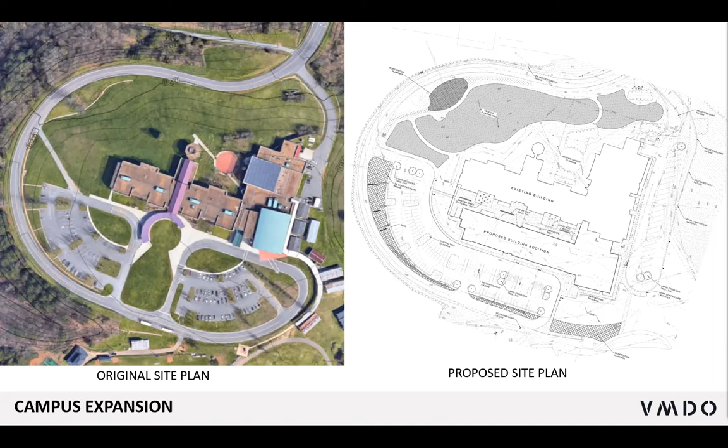Bedford County's recent $25 million Forest Middle School expansion increases capacity to 1,200 students with a new addition featuring a secure entrance, competition gymnasium, additional arts and media spaces, and most importantly, transformational learning environments for 6th, 7th, and 8th graders. The project would add significant new learning space to a 1994 building, reconfigure site circulation, and provide targeted renovations to a limited number of existing facilities.

A key goal of the project was to replace nearly 25-year-old modular classrooms, initially thought of as temporary, but that had clearly outlived their welcome on this campus. The openness and separateness of these remote trailers created a sense of unease among all learners and spurred a committed effort among the design team to create a cohesive, safe, and secure campus.

In order to allow foot traffic to and from these modular units in the school building, doors in both were kept unlocked. This and exposure to weather during travel in and out posed a serious security threat to the school community. As it was essential for school to continue uninterrupted in this location, an important part of the design process involved coordinating planned new construction and renovation activities with the existing school calendar.

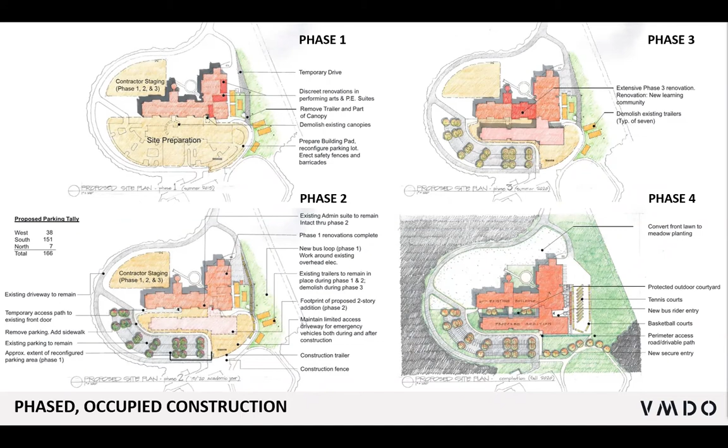The new school gymnasium is designed to serve as a protected shelter from weather and other emergency events. In addition, it provides learning and activity space during and after school, more than doubling the square footage for physical education, instruction, and activity. By increasing the seating capacity and court size in the new gym from the original undersized facility, athletic competitions at Forest Middle are safer events now. There's less crowding of the court and common areas, enabling spectators to keep a safe distance from participants.

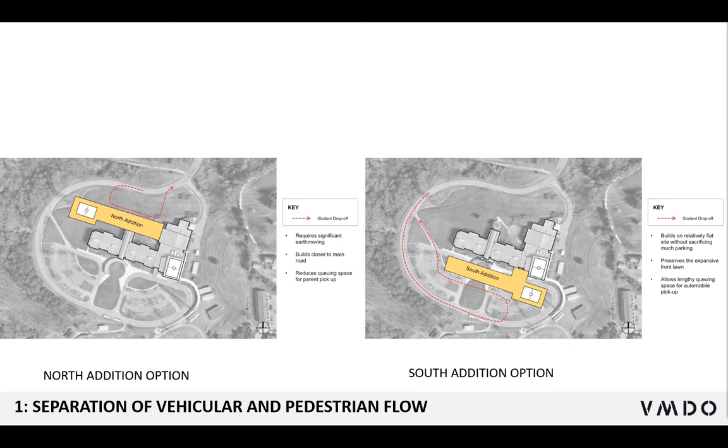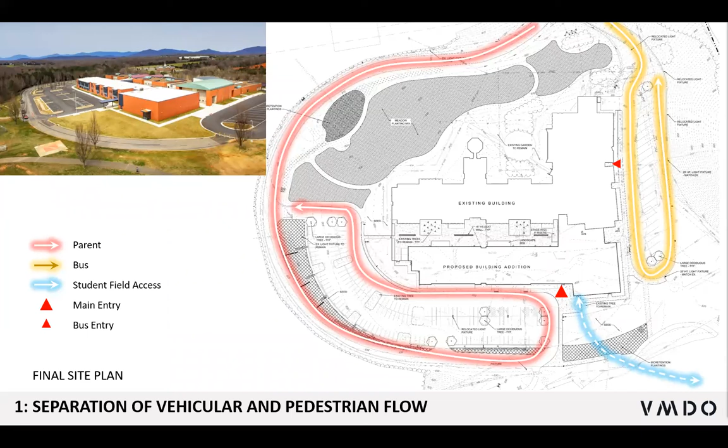Principle number 2, a singular entry. A clearly identifiable school entrance helps to direct all visitors to a central check-in location, simplifying monitoring responsibilities and making intruders who approach other school entrances more obvious. At Forest Middle School, an existing sculptural entry canopy was relocated and incorporated in the new design to emphasize the school's entry point.

All doors are now secured with badge access technology rather than keys. This gives school staff greater control of who can gain entry, through which entrances, and when.

Principle number 3, views from the front office. Abundant exterior windows at the reception area allow the school staff there to monitor everyone approaching the school. In this view from the reception area, front office staff have a commanding view of the school parking lot, of students, and of visitors. The school resource officer's office, just to the left in this view, has a similar view and overlooks the secure vestibule as well. The glass used in this area of the building is laminated to resist forced entry.

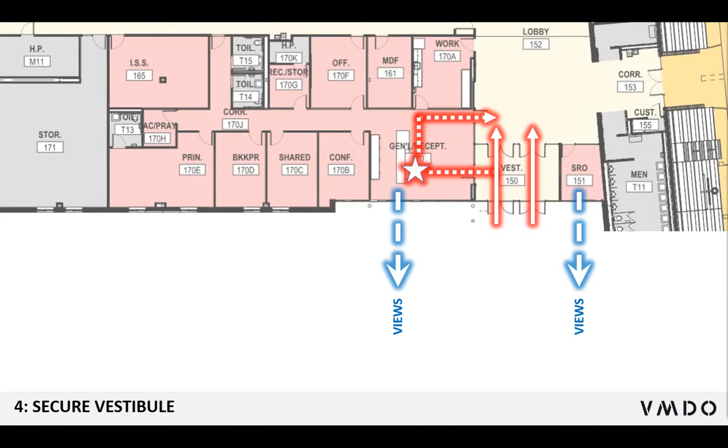Principle number 5, discreet guidance entrance. A modest entrance to this suite off the beaten path gives students a chance to duck in to see a counselor without attracting the attention of their classmates. Repurposing this original school office space into a private and respectful suite allows for expanded mental health services, placing the counseling staff in spaces connected to community mental health agency personnel and the school clinic.

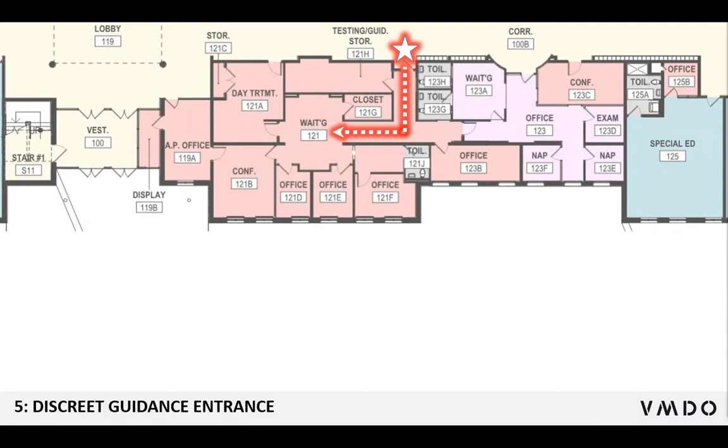Principle number 6, a cool down zone. Outside of the principal's office and separate from the school's public lobby, a small safe space is provided for agitated students who can wait to meet with administrators without being seen or heard by others.

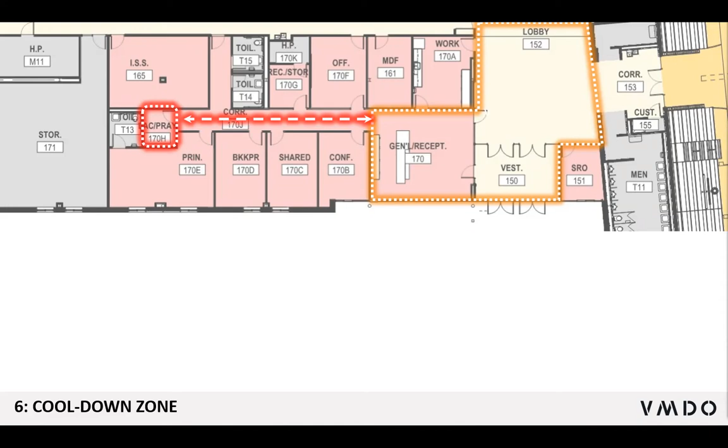Principle number 7, improving internal circulation. Previously arranged as a long singular spine, this new enlarged school is arranged around an oval of circulation, reducing traffic congestion and offering multiple pathways for teachers and staff to quickly respond to incidents.

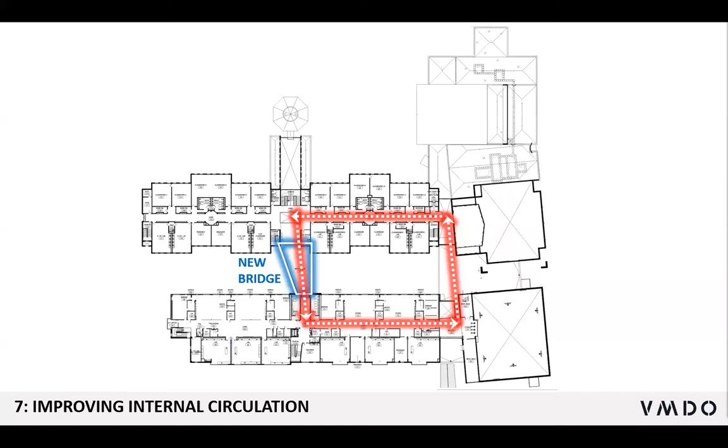In this view, an open second-story occupiable bridge connects the original school at the top of the plan with the new parallel addition at the bottom of the plan and overlooks the interstitial courtyard. This is a flexible and open space that, in addition to school circulation, serves as a project-based learning center and an expansion of the traditional library.

Principle number 8, layers of security. Threats identified outside the school entrance can be thwarted by closing and locking intermediate doors that isolate learning communities from the school's entrance. These are represented by the red bars on the floor plan. A panic button in the school's reception area automatically releases magnets that otherwise hold these pairs of doors open.

Bryce? A key benefit to this strategy that we've used in multiple schools is that we're isolating wings of the building rather than simply isolating classrooms. This allows the interior of those wings to be designed in a much more open and connected manner, and creates a better overall interior environment for what is the primary function of this building, education. During an event, however, it allows staff to potentially work together should an incident occur rather than being isolated or cut off from each other in their own individual classrooms.

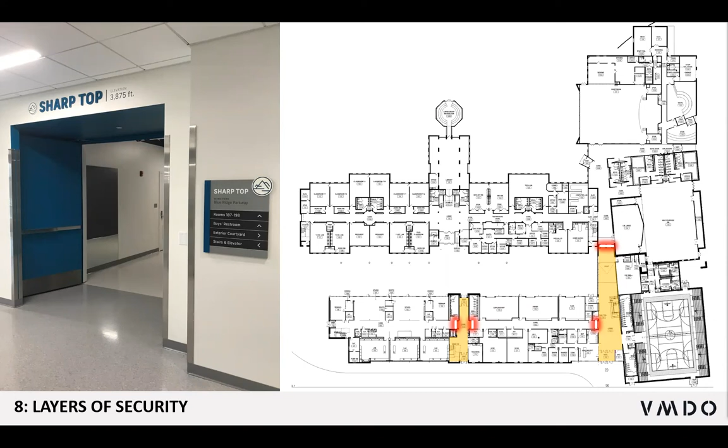In addition to this technology feature, interior and exterior security cameras are posted throughout the original and new parts of the school to enhance supervision, with access for viewing by school administrators and the school resource officer.

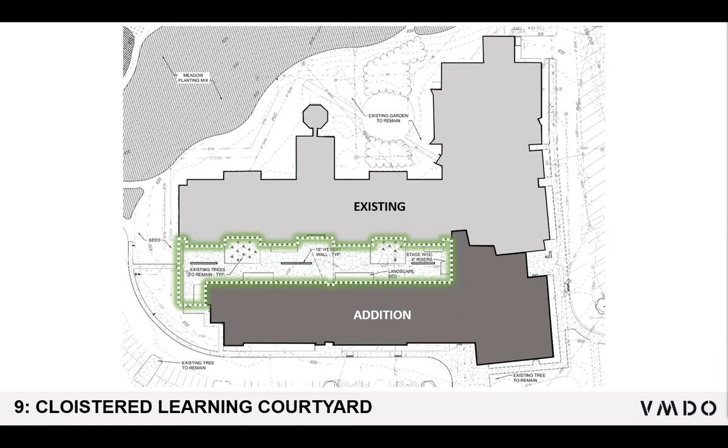Principle number 10, hard shell, soft middle. Throughout the design process, this client remained concerned about external threats facing the school. As such, exterior facing walls were made more substantial than interior walls, or walls that face the courtyard. Once inside the secure perimeter of the school, the environment is quite open, with views across classrooms to the courtyard, giving instructors the confidence to allow students to work independently outside of their rooms, and even out of doors.

This is a diagram that just shows the relationship of that classroom space to the courtyard, which is in green. The red arrows represent direct access points at ground level, the larger ones being from corridors and the smaller ones being direct access from classrooms themselves. And then the design of the interior environment allowed for more transparency, not only between the corridors and the classrooms, but also through some of these classroom spaces, allowing occupants to experience the courtyard, even if they're in the corridor space.

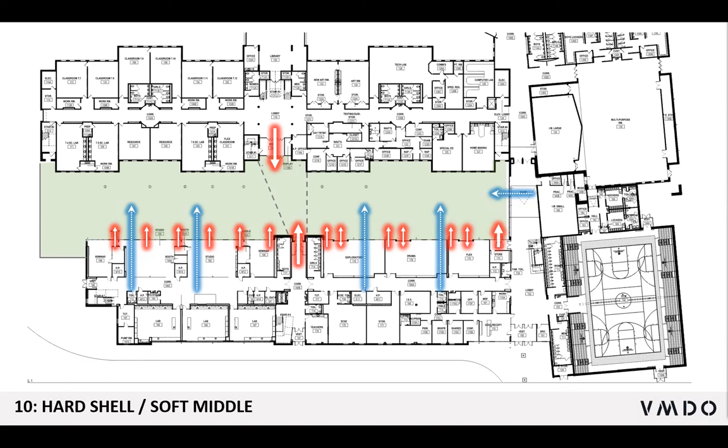This was a particularly challenging issue to resolve with the client, as Mac mentioned. The courtyard was designed to have one open end with more distant views, but there was a desire that was a consensus among the school board to enclose that end and create an entirely enclosed courtyard. Still, there are views across the top of the wall, particularly from the media bridge, that are stunning.

Principle number 11, combining open and closed classrooms. With an abundance of new studio classrooms, giving students proximity to traditional enclosed classrooms for a rare but serious lockdown event was an important feature for this client. Similarly, the completely enclosed gym, as we showed previously, offers a space without glass that is protected from wind and storm events.

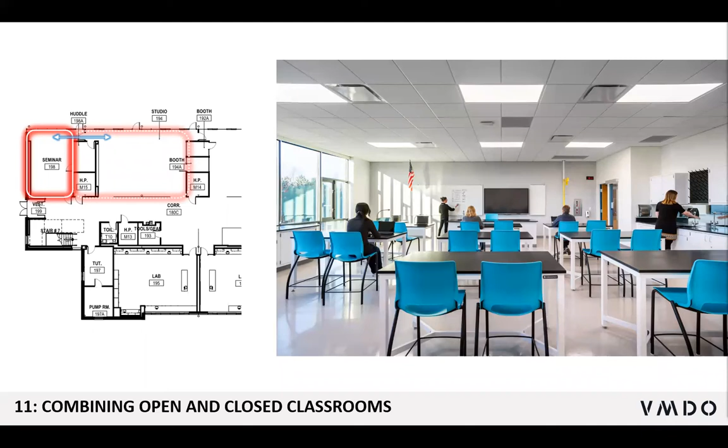This is an example of one of the enclosed classrooms, and the diagram on the previous slide just showed how there's direct access from the classrooms that are open to the corridor to a closed classroom should they need to shelter in place.

Principle number 12, avoiding hiding places. This school aims to eliminate secluded places so that children can rarely be out of view of instructors or their peers. Stairwells, which are traditionally isolated places, are planned with openness and gathering opportunities nearby.

Principle number 13, safety during construction. Because the construction of an addition is happening adjacent to a continuously operating school, special attention was paid to phasing plans, clear separation of construction zones, new circulation patterns, and robust safety barricades.

Here is an example of a mailer that was sent to all parents prior to the school year in which school operations would be coincident with campus-wide construction, showing them exactly how they could expect traffic patterns to change before they arrived at school on day one of the fall semester.

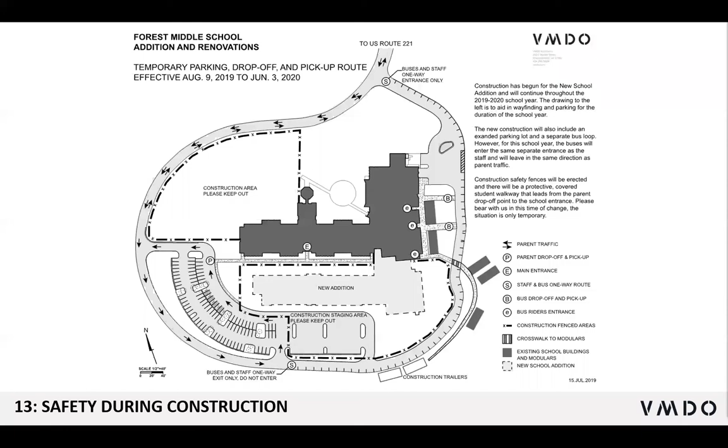Architecture can do only so much on its own. Boiling the preceding 13 points down to their essentials, we find that the transparency allows students to be visible to both staff and to each other, and that a unique school design, which is customized to suit its own culture and curricular initiatives, offers students a sense of place to which they can belong.

The creation of a welcoming, open, inclusive environment supports teachers and staff in building a more cohesive culture, while the concepts of seeing and being seen, and thus the transparency that we've spoken about, are key components to enhancing safety and security within the school.

The variety of learning spaces in the school allows staff to co-teach, collaborate, and communicate in new ways to design learning opportunities. When teachers work closely together to support diverse learner needs, more attention can be paid to the social and emotional aspects of learning.

As you have seen in the photographs of the school's interior, the purposeful and creative design of wayfinding signage and the inclusion of themed environmental graphics give a sense of structure and order to the overall design and connect the original and new parts of the building.

The photography of a longtime teacher in the signage and environmental design situates the school in the larger community and ecosystem and promotes a sense of pride and community belonging in learners and staff.